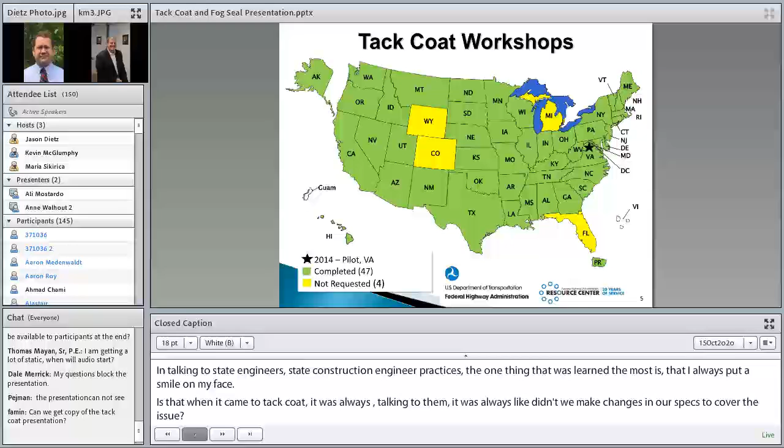And as we were doing our workshops, we found out that wasn't often the case. A lot of those specifications, they wanted to do it, but it wasn't a high priority, and that came to be a very interesting topic as we went around the country, as well as in their plans and how it was done. We'll talk a little bit more as we go through here today.

So some of the outcomes that came out of those workshops: Federal Highway had a best practice tech brief, and at the end here there'll be a site where you can go for further information. There also came the development of AASHTO specifications that weren't readily available, and here were 2, the MP 36-18, as well as the PP 93-18, for material and design specs.

The construction specs are currently in the works, but at least we have these 2 to get started with. And then came the NCHRP synthesis report that we're going to talk about today, because I'm not really sure many people knew much about that.

And then increased application rates - everybody was worried about putting too much tack on, so we'll talk about that, as well as DOT specification revisions, as I mentioned before. I spent a lot of time working with state agencies on making those modifications to their specifications and getting up to speed.

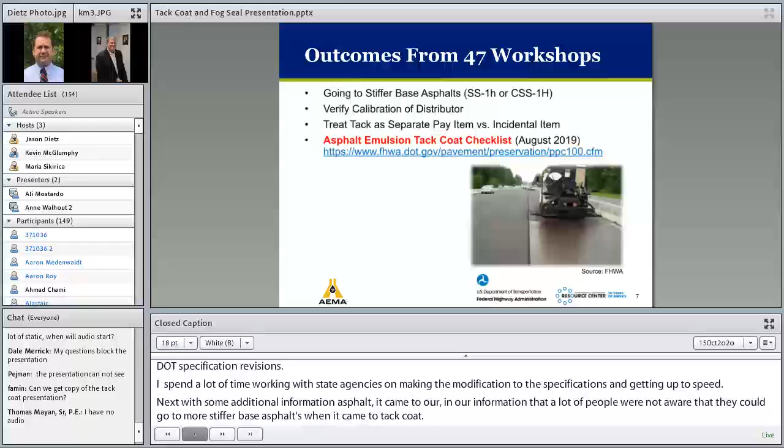Next, some additional information, going to stiffer-based asphalts. It came to our information that a lot of people were not aware that they could go to stiffer-based asphalts when it came to tack coats. So in simple terms, it was just by changing a slow setting 1 to a slow setting 1H, or a cationic slow setting 1H. Having those stiffer-based asphalts made a difference, and it was nice to get feedback from some of the states that made that change and said it worked really well for them, as well as verifying the calibration of the distributor.

That became a very interesting topic - we found out that oftentimes distributors weren't calibrated. We do it for our hot mix asphalt plants, we do it for a lot of other things, we probably should be doing it for our distributors as well.

Treating tack as a separate pay item was another thing that we saw, versus an incidental. And then another thing that came out is we had a checklist. For those that are aware, Federal Highway has many checklists for different preservation treatments. We also incorporated another one for tack coats, and as you can see from the site shown there, for further information if you would like to see it.

Moving on, we're going to spend some time talking about the synthesis the most because I'm not sure many people are aware of it. This report came out of the 2016 annual meeting at TRB Standing Committee on Surface Requirements of Asphalt Mixtures. Many practitioners discussed the immediate need for a summary document regarding the state of the practice of tack coat specifications, materials, construction practices, and acceptance procedures. A lot of that information wasn't well known. Thus, we established this group, and I want to share with you some of the things that came out of that document.

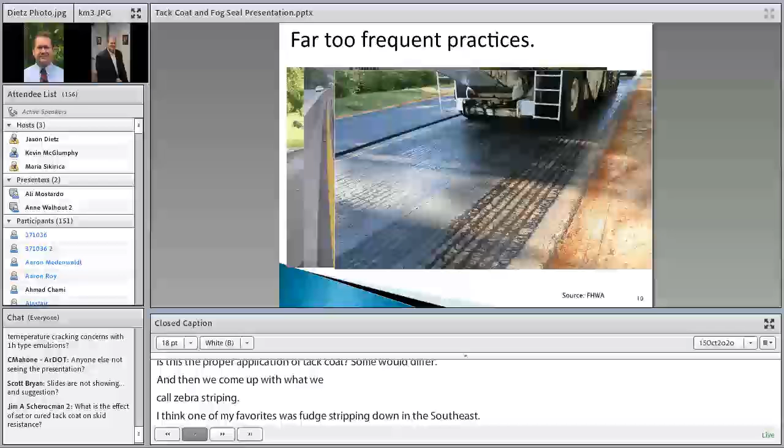And then here's another one. Again, more windrows. Looks like some of the nozzles are spraying a little bit more in some. So we really want that triple overlap to make sure we get that proper bonding.

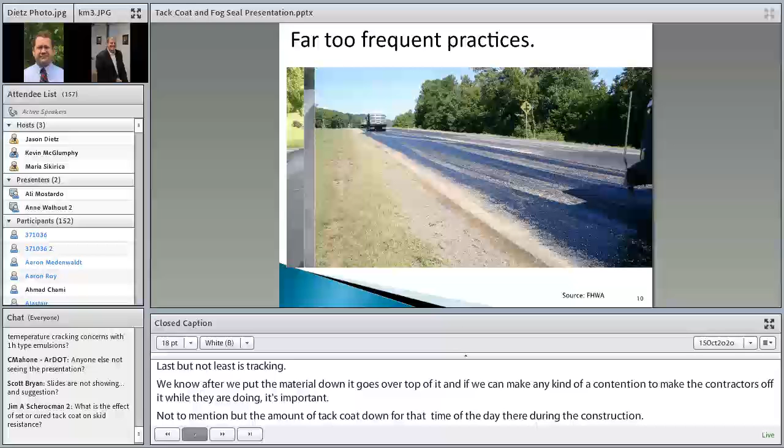And last but not least is the tracking. We know after we put the material down, trucks go over top of it. If we can make any kind of intention to try to keep the contractors off it while they're doing it is very important. Not to mention, put the amount of tack coat down for that period of day of what they're going to be doing the construction. If they're going to be doing more work tomorrow, try not to put the material out for that ahead of time. Do that the next morning. That way you don't run into issues of people running over it during the nighttime, and there could be some problems that may occur from that as well.

Furthermore, at nighttime, often many agencies through the cities, we do a lot of nighttime construction, no difference. We see a lot of tracking, so we need to improve this.

The first one, let's look at the definition. A tack coat is a sprayed application of an asphalt cement upon an existing asphalt or a Portland cement concrete pavement, which may or may not have been milled before an overlay or between layers of fresh asphalt concrete. So there is a difference, and oftentimes we get questions, what's the difference between a tack coat versus a prime coat? Well, a prime coat is when you spray the material over a subbase or a base material and then put the material over top of it. So there are differences.

Moving forward, what do we mean by undiluted emulsion? That is emulsion that consists of a paving-grade asphalt, water, and an emulsifying agent. When it comes to diluted, it is that emulsion with additional water added to it. The most common case is a 1-to-1 or 50-50 part undiluted emulsion with 1 part additional water.

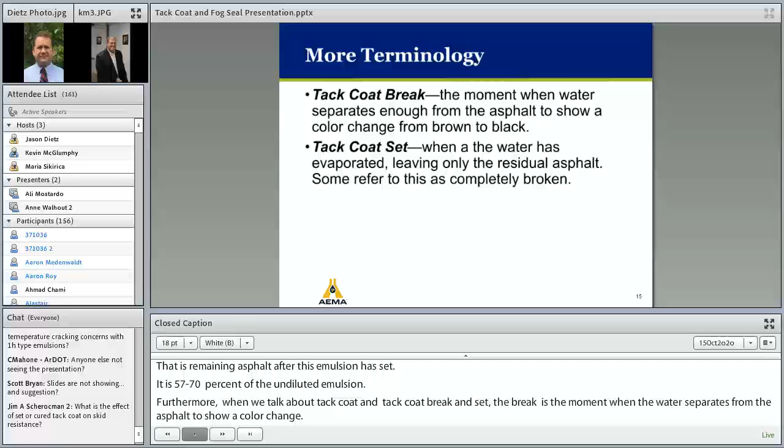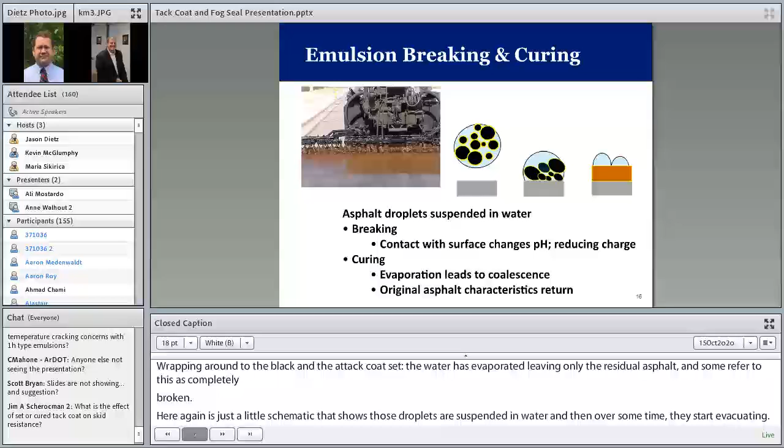Here again is a little schematic showing those asphalt droplets suspended in water. Over a period of time they start evaporating, and you're left with that brown material. It's breaking as the surface pH changes, reducing that charge, and then it turns black. It cures as the evaporating leads to coalescence, and the original asphalt characteristics return. So that's overall the breaking and setting of the emulsion itself.

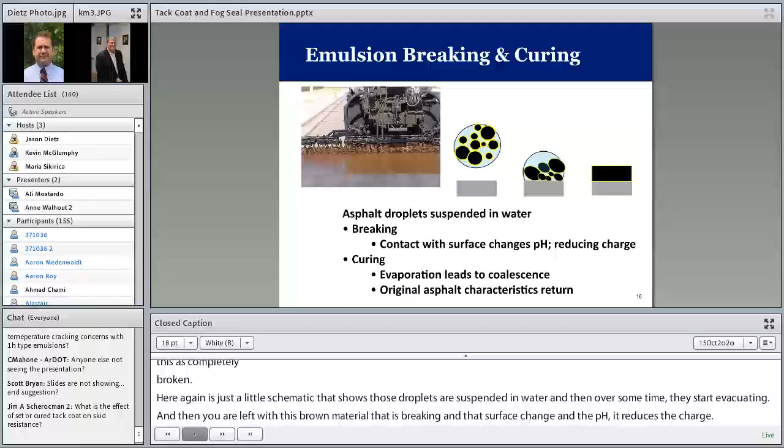So it leads us to our first poll question. Let me bring up the poll. A broken emulsion is the remaining asphalt after emulsion has set. True or false?

You got 50-50. Now it's jumping back to true. We'll leave it another minute or two, and then we'll close the poll and broadcast the results a little bit. Looks like true is coming in.

We'll end the poll. The question was: a broken emulsion is the remaining asphalt after an emulsion has set. That is actually false. It's the tack coat set that is the remaining asphalt after the emulsion has set. Thanks for responding, almost there, but that terminology plays a very important role when it comes to understanding tack coats. Moving on.

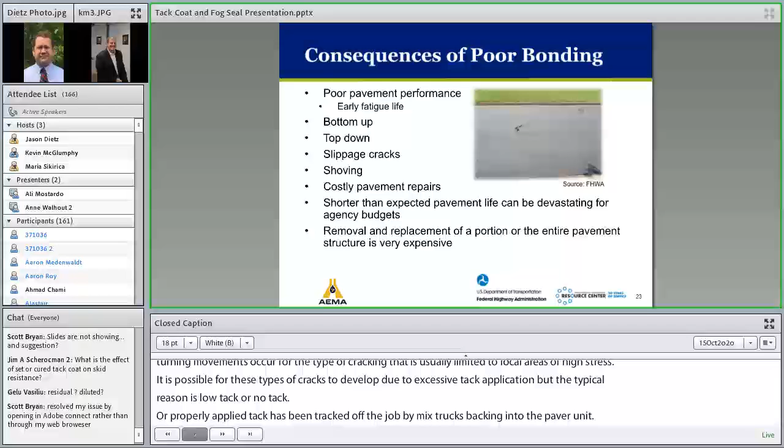So as we look at that, the question I usually ask folks is what would be the direction of the traffic. You may have it one way or the other, but oftentimes the traffic is moving in the direction of the red area.

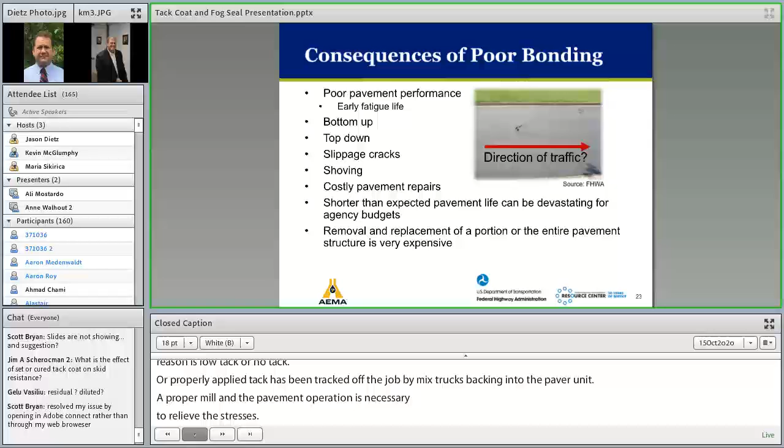Moving on, back to the survey, when it talked about the failure types cited by the agencies, the number one that came in was slippage of surface layers. The other one was delamination of the pavement layer. It was interesting to see the results that came out of this.

Moving on, the loss of fatigue life examples. Oftentimes people want to know what the published research shows about the consequences of bond and its effect on fatigue. Here's some literature that came out from May and King, done in 2004 for a TRB presentation. They found that 10% of bond loss resulted in 50% less fatigue life.

Another one, Roffe and Chaignon, from 2002, talked about characteristics testing on the bond test. And then the last one, Brown and Brunton - the influence of bonding between bituminous layers is what their journal talked about. They mentioned that for no bond, there's 75% loss of life. So it makes a big difference.

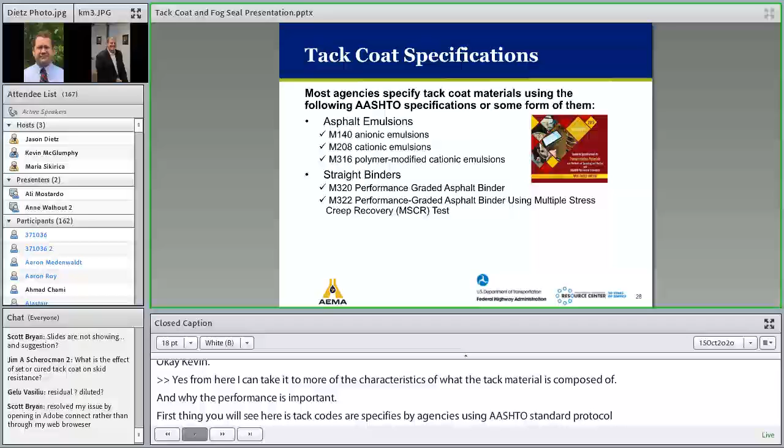First, tack coats are generally specified by agencies using AASHTO standard protocol. You can use emulsion or binders in most states, or a combination of the two. I'd caution you to contact your local state agency and/or your local suppliers to be sure the nomenclatures used are available in your state or area. Some states will change nomenclatures and write their own version of a specification, so always reference your state manuals. These are pretty standard: M140, M208, M316, M320, and M322 are the standard binder specs and limits.

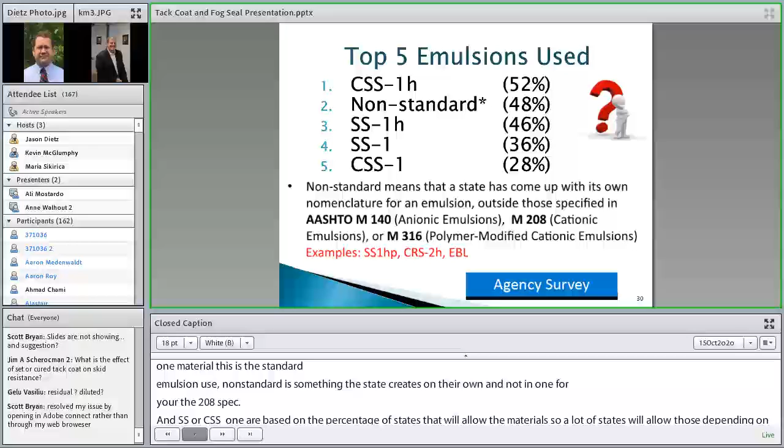Breaking that down further, as mentioned, some states allow more than one material. This shows the standard emulsions used. The SS1H non-standard would be something the state creates on its own, not in the M140 or 208 spec. And then SS1H, SS1, and CSS1 - those percentages are based on the percentage of states that allow those materials. A lot of states will allow CSS and SS depending on what suppliers can provide and a mixture of these things, so that's not supposed to add to 100 - it's not the percentage of states allowing that usage.

Reduced tracking tack emulsions are something that's come up over the last 8 to 10 years. It tries to keep most of the tack under the pavement instead of tracking up on the wheels and equipment on the construction site. It's a chemistry adjustment and/or penetration adjustment to the tack coats, and there are a few different types. 24% of the non-tracking tack used has the nomenclature NTSS1HM, and there's a bunch of different varieties - most emulsion suppliers have their own version of a reduced tracking tack. I'd recommend you reach out to your local producer or supplier to get their perspective if you're going to use that.

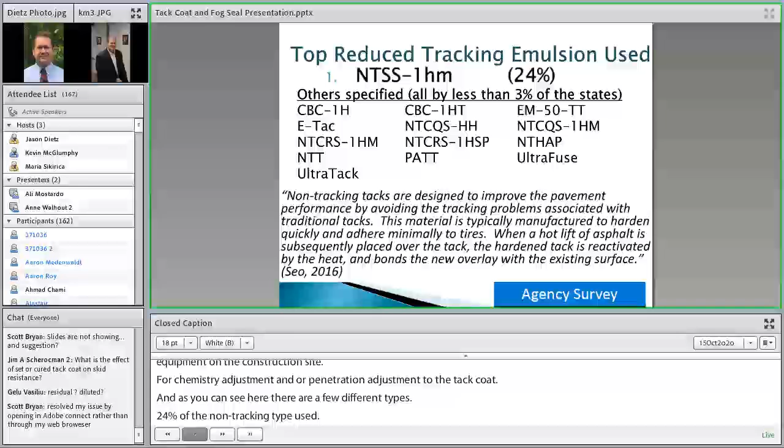Material acceptance. Every agency generally has a method for material acceptance. If you are using standard AASHTO acceptance materials, you generally just have to be on an approved source list with a DOT. You get on that approved source list by doing some paperwork and submitting some samples and testing. And once you're an approved source, you have to comply with a quality control program that the DOT approves for you.

To be able to ship materials in their state to ensure that you're providing quality on-spec material for them. Some states have supplier certifications, which is a little different, where your material meets the agency spec, and they just assume and act as if because you met the spec that you are certified to supply there. And then the testing of samples is a regiment that's under your QC plan.

There are some things that are one-off type materials that we talked about that aren't standard. And in some of those instances, the supplier will produce a material that performs in the field in trial mode. Once the DOT sees the performance, the specification is shared with the DOT from the supplier, and the tests for supplier certification are then reflective of the test of the material that was trialed.

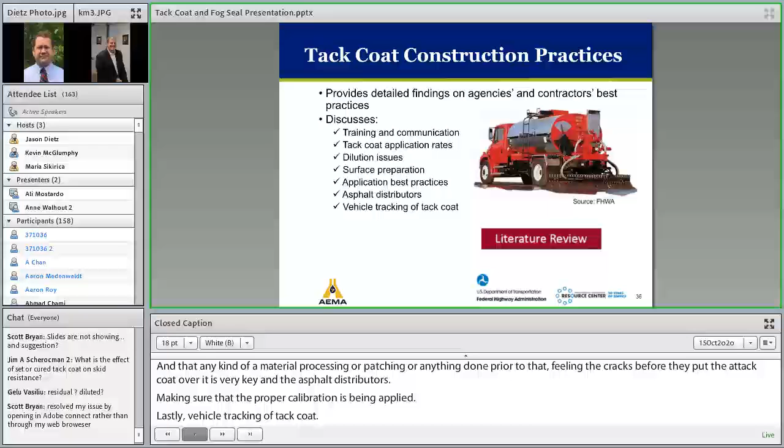Next, through the survey, I looked at dilution, looking at the pros and cons. And as you remember at the beginning, when we talked about dilution, usually that is adding water into the mix. Through the survey, it looked at the agencies, and it was a fairly even split regarding whether or not they diluted it.

The pros: larger liquid volumes allow easier flow, and often that was the case that we saw for most of the western parts of the country, where the areas of their pavements were a ways from the plant. They wanted the ability to have dilution, not to mention with that water that provided them extra time. Larger liquid volumes also allow easier overlap of the fans, and that was often the case when a lot of this equipment was from earlier days—not saying nowadays, but with the more advanced equipment we're seeing out there, this may not be as much of an issue as it once was.

And then looking at the dilution cons: the risk of losing control of the product, adding additional time to break, and lastly, increasing that risk of the tack flowing on the roadway surfaces. We didn't want that to happen.

Moving on through the survey, what was allowed and what wasn't was pretty close to being a straight split. It came in at 48% dilution and 52% not diluted. Oftentimes we see on the undiluted side, it's most of the states east of the Mississippi that really didn't have to worry about diluting it as much.

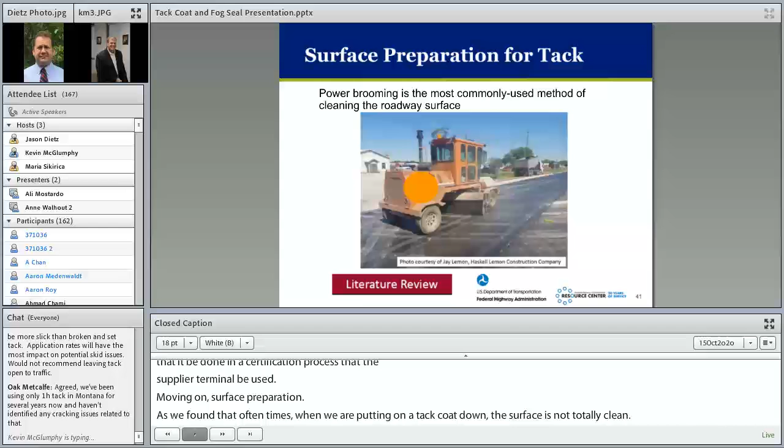So the survey asked a few questions on this. Power brooming was the most commonly used method for cleaning the roadway surface. In addition, they looked at air blowing and vacuum, which came in at 25%. Multi-specified methods came in at 2%, and clean but method not specified came in at 33%. So that is an area that we probably need to do some work on in our specs, to clean that up so it's not just left unspecified.

Moving on, what do we mean by clean? That was another question in the survey. The surface must be dry - and what do we mean by that? Oftentimes when we did our workshops, we mention SSD, saturated surface dry.

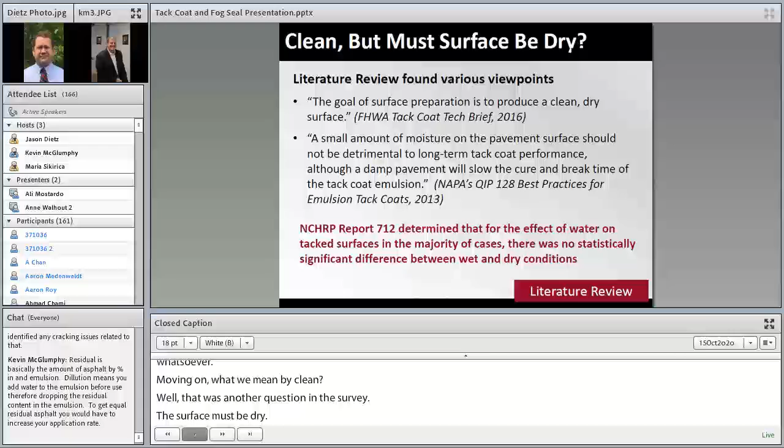It may have a little bit of moisture in it, but in areas of the country like Florida, with the amount of rain they get, to get completely dry would be impossible sometimes. So some of the things that came out of this: the goal of surface preparation is to produce a clean and dry surface - that came from the Tack Coat Tech Brief. In addition, a small amount of moisture on the pavement surface should not be detrimental to long-term tack performance, although a damp pavement will slow the cure break time of the tack emulsion.

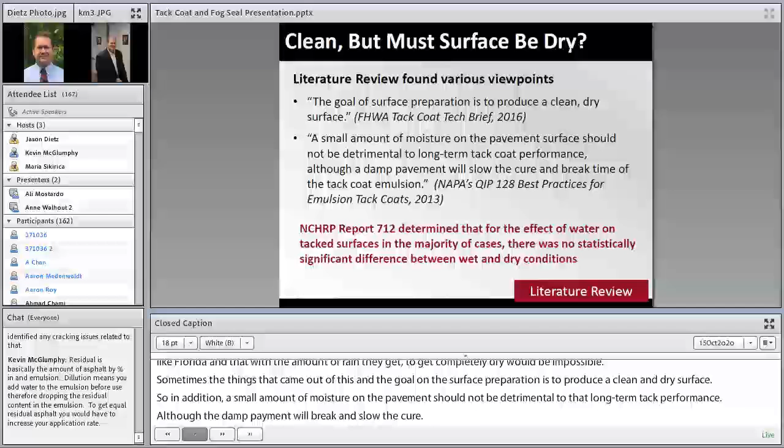Another thing came out of NCHRP Report 712, which determined that for the effect of water on a tack surface, in the majority of cases there was no statistically significant difference between wet and dry surfaces. So that was kind of nice to have and something to share.

Furthermore, another important thing that doesn't get recognized as much is the application temperatures. As you can see from the differences in the types and grades - the rapid sets to the slow sets, and moving down to the rapid sets to the non-tracking materials - temperatures play a really important role.

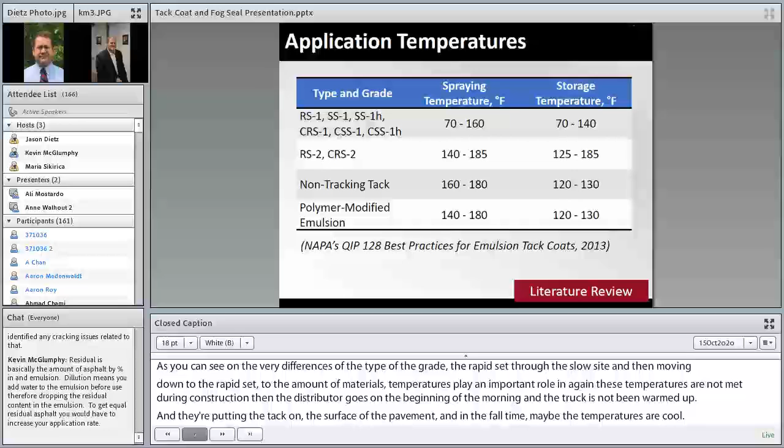And again, if these temperatures are not met during construction - the distributor is going out at the beginning of the morning, the truck has been sitting there all night long, and he hasn't warmed up the truck enough - and he's going out there putting the tack on the pavement surface, say in the fall time when the temperature is fairly cold, he's not properly getting that proper temperature that he needs, so he's not getting the proper break and set time, and that can cause tracking. This was something I personally felt was an issue we've seen across the country that probably needs to be inspected a little bit more, and it could help out when it comes to tracking issues.

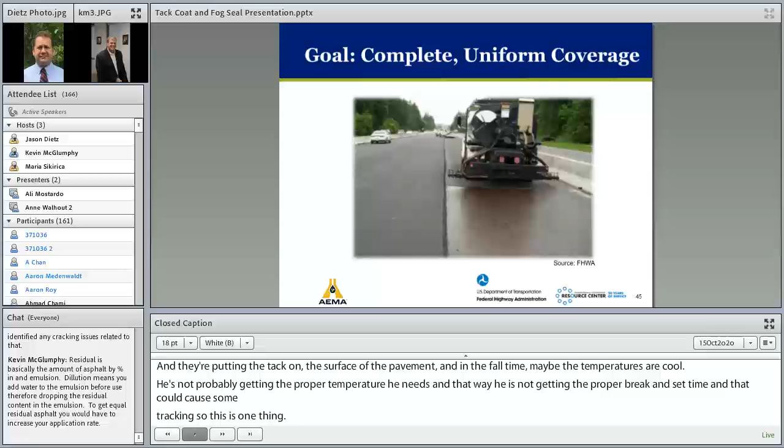Moving on, some of the goals to complete that uniform coverage were set, and we need to make sure, as you can see from the nozzles, that we're getting that proper application. We're seeing a little bit of windrows and things happening, but we want to make sure that the coverage being set by the distributor is complete.

Furthermore, for the spray requirements for the distributor: have uniform nozzles. Oftentimes when these distributors come out of the manufacturer's yard, they have a size 3 on some of these distributors, and oftentimes when they're putting a tack coat down, the size of those nozzles is usually another size, like a 1. So right then, they're putting a bigger nozzle down, putting more emulsion onto the pavement - that's maybe why they're turning off some of the nozzles, and that could be an issue.

So we also need to make sure they're clean - periodically they need to be cleaned out. Have that maximal angle - oftentimes 35 degrees for each nozzle, for each valve, is often recommended. Having the proper height of the spray bar, 12 inches, which is most common. Having that triple overlap, where we get excess material to cover so we don't have windrows, and double overlap of emulsion streams, and then lastly, spray without overlap of the emulsion streams.

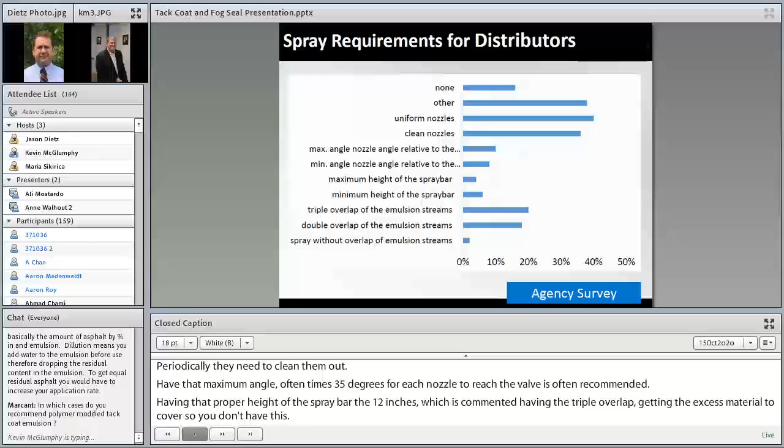So what came in the highest was cleaning those nozzles and having uniform nozzles - they're very important.

Okay, we come to our next polling question. How often is the distributor calibrated? Let's bring up this poll.

Now, be honest. When you see this on your projects, how often do you think these distributors are calibrated?

All right, I'll broadcast the results. Looks like, Kevin, folks are responding that it's annually, and it's kind of nice to see. I'll end it. We got a few there that say never. And then we have some that say per job, but other was not. So that was one of the questions that we wanted to get out of the survey.

So let's hide that, and let's see what came out of that survey when it came to this. Hope this won't be a surprise to folks. But through the survey, how often were these distributors calibrated? Look what came in number one: it was never. Then came other, then annually, and then per job.

But oftentimes, as we found, most agencies have the bill of ladings, and if they could use those bill of ladings and maybe incorporate another item in there about when the machine was calibrated, that might be a simple way of correcting that. But again, that's just a recommendation on our part that we wanted to share with folks.

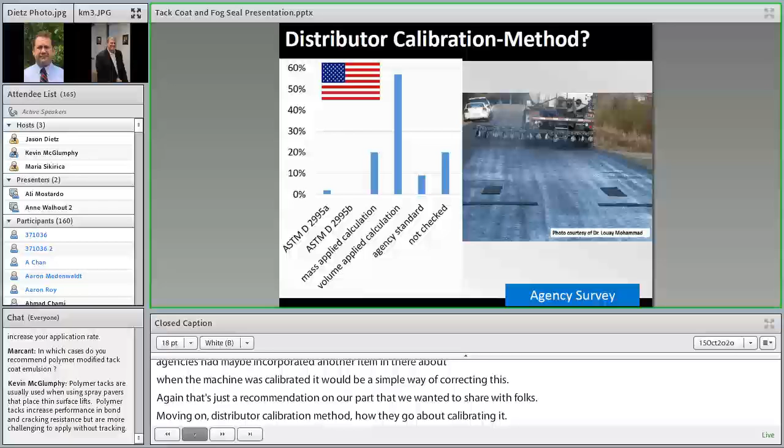And then looking at the volume, maybe bringing out your dipstick that's on top of the distributor. Often people don't know that, but on top of the distributor is a hole, and the dipstick is up there where it's magnetic to the distributor. Take it out, and they just poke it in, and then they take that measurement in the morning and in the afternoon, and that's how they calculate their volume.

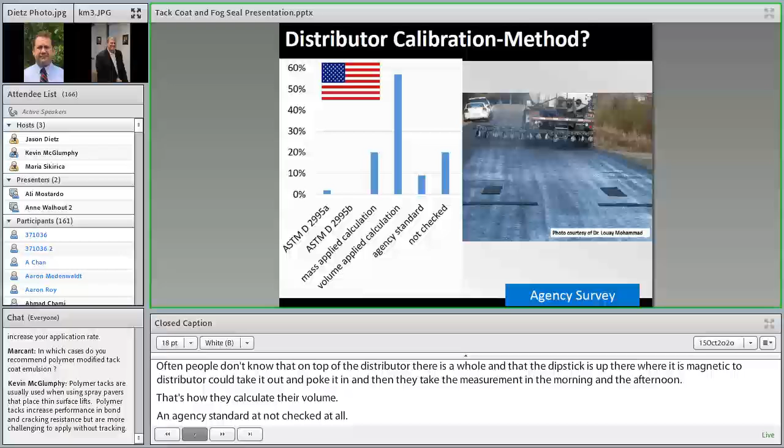And then agency standard and not checked at all. So there's a variety. And through the ASTM procedures, you can see the felt pads that are being applied onto the roadway, and one can put them on and then over to construction, at the spray application, being sprayed, and then they can take whatever method they have, take those pieces of felt off, weigh them, and then get their understanding of what that application rate is.

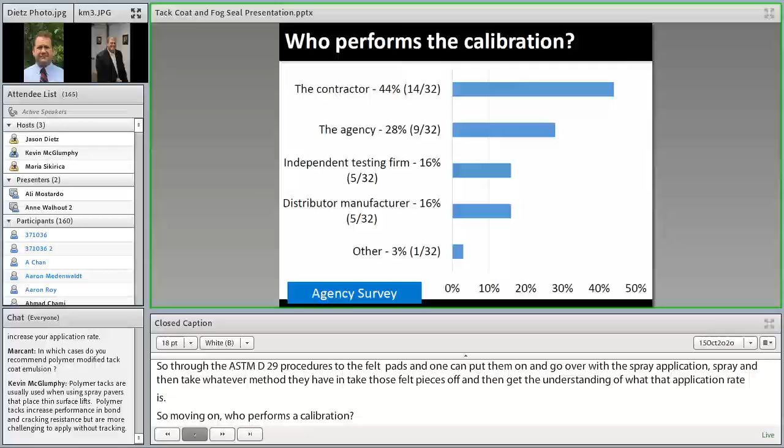Moving on, who performs that calibration? It's nice to have a calibration, but who's going to perform it? Well, as it was seen here, oftentimes through the survey the contractor did. It came out 44%. The agency, 28%. Some even had independent testing firms that were doing it, as well as distributor manufacturer, and then others. So this was kind of nice to see. At least it's being done, maybe not enough, but at least the contractors are making the push to make sure that's being done.

When is traffic allowed on the tack? That's often the big issue. As I mentioned, some places in the country apply it maybe the night before, and then they start up the next day. But is that the best way? Oftentimes through our workshops, we recommended that it be done for that day's production.

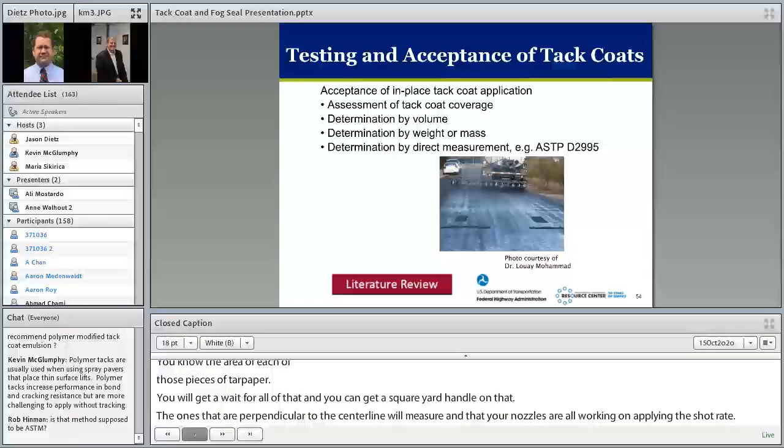I think that's the two main things from a contractor and supplier perspective on making sure you're getting what you're paying for. And I will turn it back to Jason for field performance.

Next, they also looked at the testing and acceptance of the tack coats and what methods are out there currently that agencies are using. They looked at laboratory or field bond strength testing used for product approval, and what field testing was used to assess the quality of that field application.

Some common methods for load application were tension, shear, and torsion. Others were non-destructive versus destructive, and cyclic versus monotonic.

The one here that I'm showing is from Louisiana, the interlayer shear strength tester. I wanted to share a little bit for those that may not know what this is. It's a simple test where you put your sample in, apply a load, and as that load is applied, you get some kind of shear right on that side.

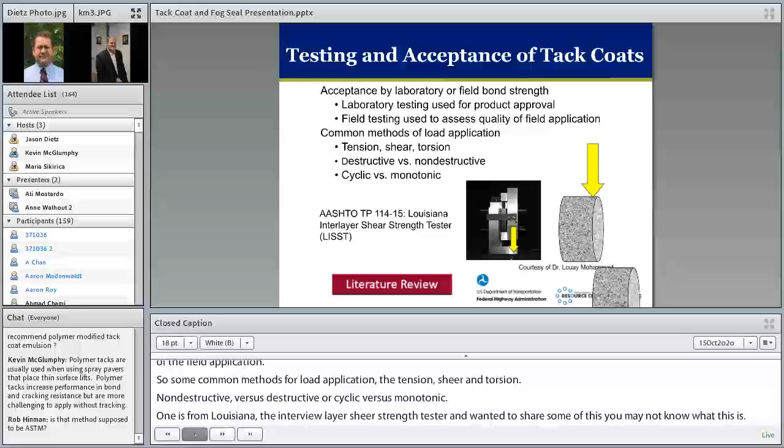For further information, there is now an AASHTO test method, TP 114-15, that agencies can use for this particular type of test.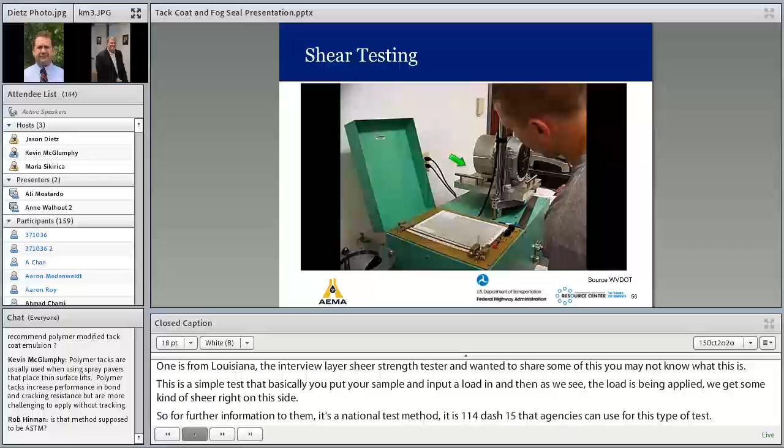That's one type of method. So looking at these bonding strength tests, 9 out of 14 states conduct some type of bond strength testing, so not too many.

Next, when do agencies perform this bond strength testing? On every project, by special provisions, for product evaluation, or as part of a forensic investigation where they had some failures. Oftentimes it wasn't on every project, which probably isn't really needed, but it was kind of nice to see.

It was interesting to see the one that came in highest was as part of a forensic investigation - they were having cracks and issues, so they looked at it, which was a good thing. But we'd like to see it become more common practice if issues are seen, done more often. Nowadays, with thinner pavements being put down, we're seeing more delamination occurring, so having some kind of test method is a good thing to have.

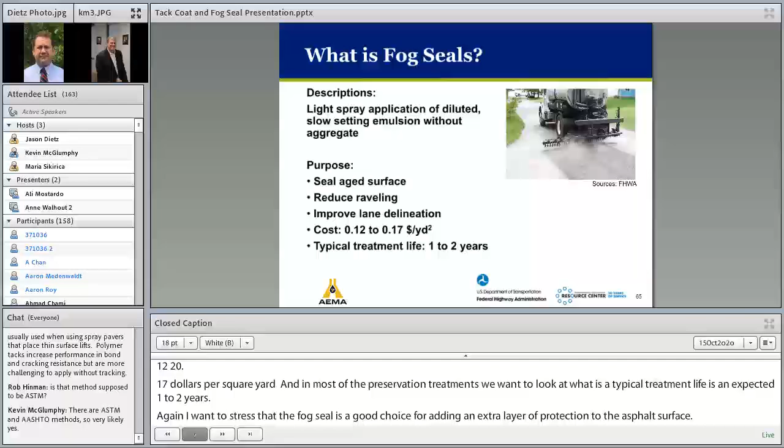I want to stress that fog seal is a good choice for adding an extra layer of protection to the asphalt surface. This seal will not compensate for more serious problems like asphalt that has experienced more than minor aggregate loss. A fog seal will also not work as a method of treating cracks or other structural issues. Fog seals should be considered a rejuvenating option, meant to offset the process of oxidation, weakening, and increasing brittleness. Eventually, the aggregate will start working loose.

Fog seal prevents this through the addition of extra asphalt binder. Fog seals also help fill any tiny spaces that form between the aggregate particles as the asphalt binder ages and wears away, ensuring that the surface remains smooth. Fog seals also increase the pavement's ability to resist water damage by reducing the amount of water that can pool onto the surface.

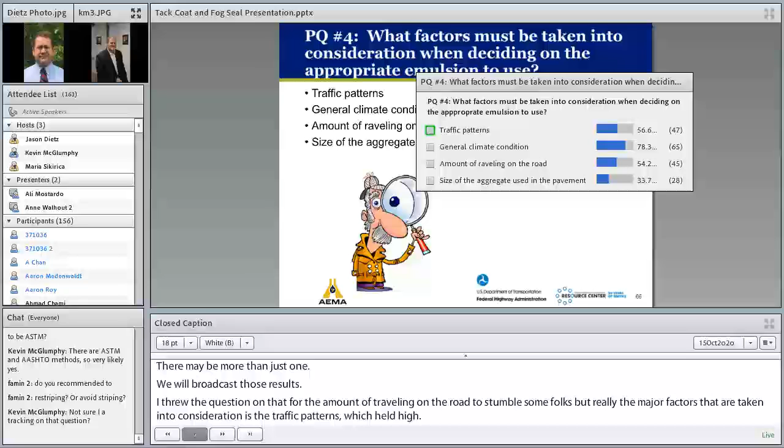We'll broadcast those results. I threw that question in there about the amount of raveling on the road just to stump a few folks, but really the major factors taken into consideration when deciding on the appropriate emulsion are the traffic patterns, the general climatic conditions, and the size of aggregate used in the pavement - all very important. The amount of raveling would help, but it's really the traffic pattern, climate, and aggregate size that matter most. Thanks for doing that.

So what is the fog seal? A fog seal application must penetrate the surface voids - this is very important. In order to successfully do this, a fog seal coat must be diluted enough to easily flow down into the gaps between the aggregate particles. There, the water will evaporate, leaving behind the asphalt that will help bind the aggregate together more strongly.

An excessively thick fog seal will end up sitting on top of the aggregate, which leads to major skid problems we don't want to get involved in. First, the fog seal will be exposed to much more friction, meaning it will wear away quickly and leave the aggregate as unprotected as it began. Secondly, by remaining on top of the aggregate, an overly thick fog seal reduces the pavement's traction. This can cause dangerous conditions on high-speed roadways, and is often the reason many state agencies haven't used it on their interstate systems, as a loss of traction makes cars more likely to skid and lose control.

So determining the ideal dilution of a fog seal requires proper knowledge and experience. And I think that's a good segue to lead right into suitable surfaces.

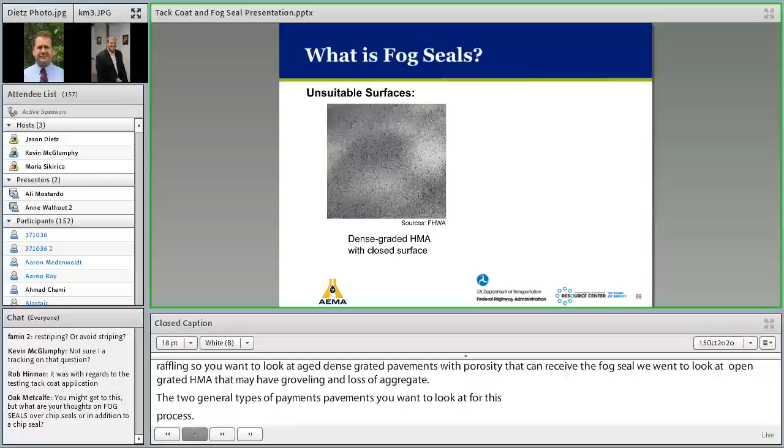So really, to get a successful job, what do you need to do? Surface prep, as in anything, is important. You want to make sure the road looks clean, relatively dust-free, free of particulate matter, dead animals, things like that. The asphalt and emulsions will not stick to greases, oils, and such, as general normal practice.

Material preparation, you just want to make sure the material is at the temperature that it will apply smoothly. So the recommended temperature, and make sure that your bars are clean.

Emulsion application rate will depend on the surface. So you want to make sure you talk to your supplier and/or applicator, contractor, or reference your DOT spec book for the types of pavements that they have. And then there's times when you'll have to have sand blotter out there. If you've got variable pavement surface conditions throughout the project, you might have to blot a few spots just to assist in the breaking of the emulsion.

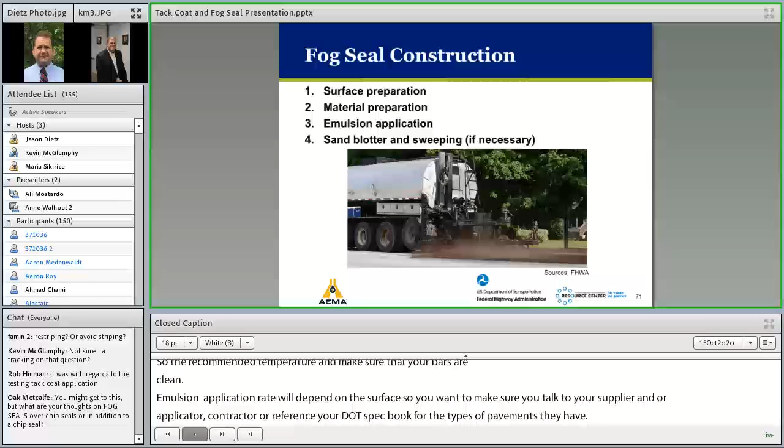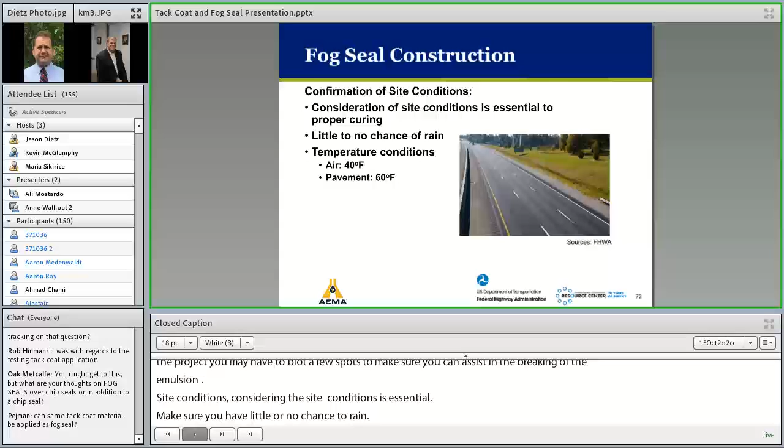Site conditions are essential to consider. Make sure you have little or no chance of rain. These are water-soluble products in most instances, so if they get rain before they break, you could have some brown staining of the shoulders and maybe the ditch line. So you want to make sure you have good pavement temperatures and no chance of rain.

Here's some example pictures of surface prep. Good clean road, it's got a little loss of fines, and this would be a perfect candidate.

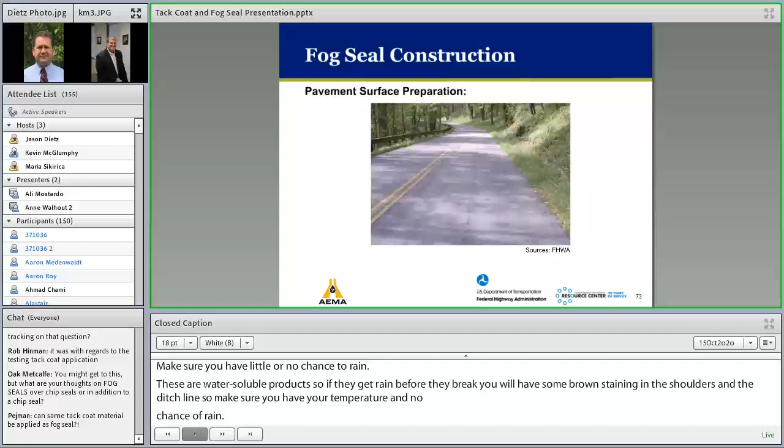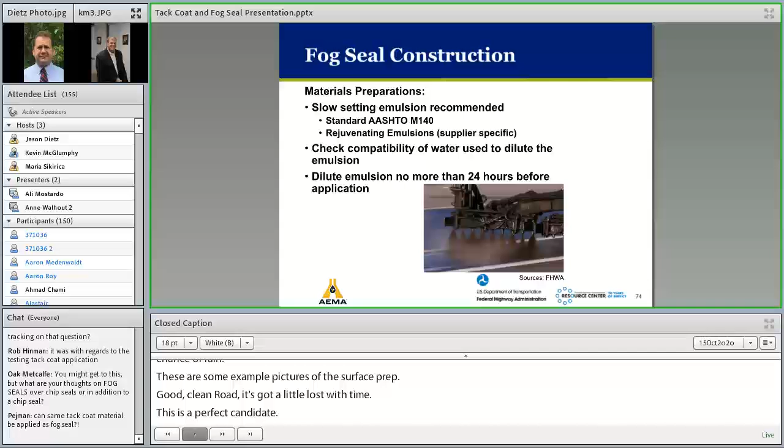So the materials that you would generally use for these are slow-setting emulsions, either CSS or SS, depending on the area of the country that you're in. Most of them are standard AASHTO M140 spec, and they will work that way. There are some higher performing materials out there, supplied by emulsion suppliers across the country, that may have polymer modifiers or other modifiers in them that will decrease the wear and make them last longer, stay blacker longer, things like that.

There are also rejuvenating emulsions that are designed to penetrate down into the surface of the pavement further and give back some of the life at the top quarter inch of binder, to kind of reseal cracks and rejuvenate the binder and the surface layer. Those are supplier specific also in most cases. So if you had those issues, you would want to reach out to your local providers and talk to them about it.

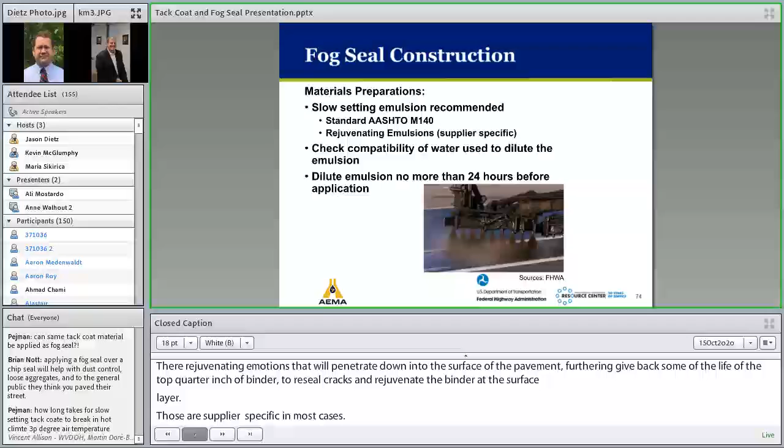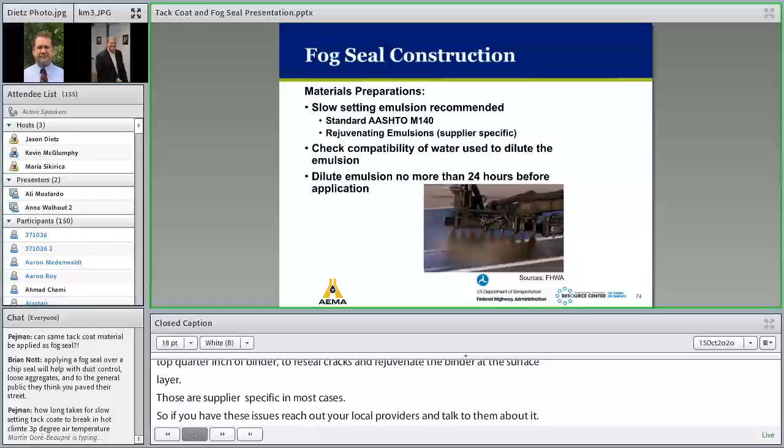Check compatibility of water used to dilute. Not all emulsions are miscible with water. There is a miscibility test in the AASHTO T59, I believe. I think it's still T59. But if you're going to dilute a slow set emulsion, you would want to make sure that test was run so that the water did not break the emulsion in the distributor. And then you want to dilute the emulsion no more than 24 hours before, so that there's no settlement or separation.

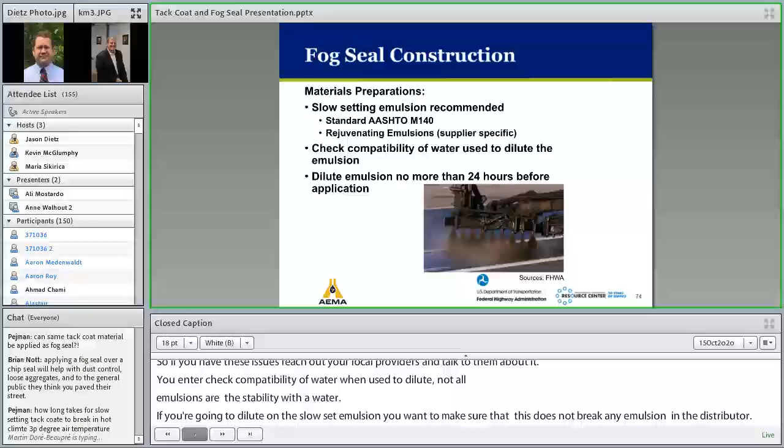Application-wise, you want to have a pre-construction meeting, understanding of the application rates, calibration of the distributor, good idea in that phase. You want to know your pump rates on your distributor, and a lot of distributors nowadays tie the pump rate to the velocity or speed of the distributor so that you're sure you're getting the right application rate in the wheel path. You also want to check the application rate across the bar. Talked about earlier for chip seal, so the calibration of the distributor is pretty much the same for fog seal and chip seal. The application rate's just different.

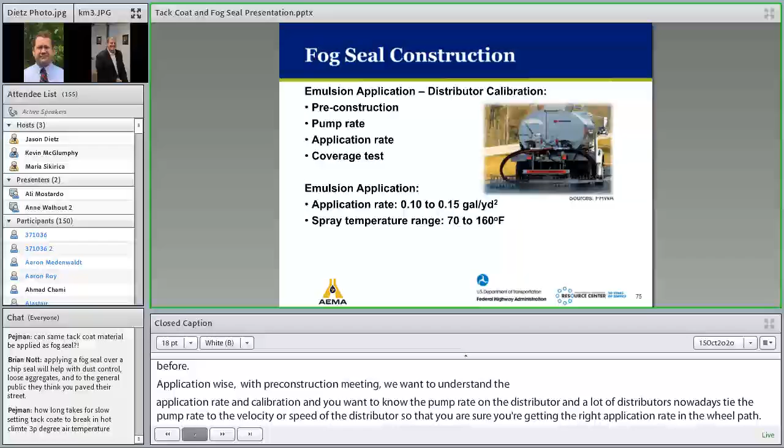And then you want to make sure you're getting full coverage and not wind rowing or corn rowing, depending on what part of the country you're in - they call that different things. The application rate's usually very low, considering, and the spray temperature of SSs and the CSS type emulsions are 70 to 160, so it's almost ambient.

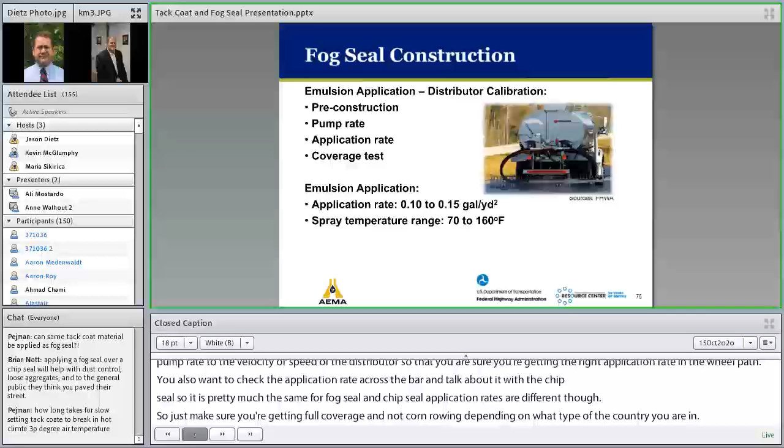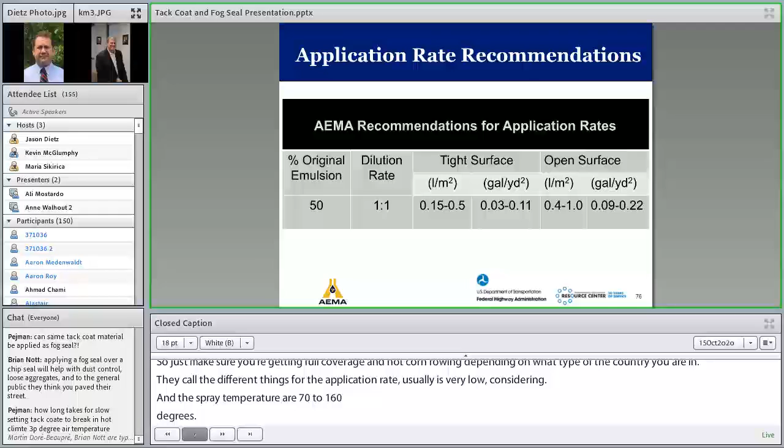Here's a little calculation showing emulsion, percent original emulsion dilution rate, over a tight surface that's like a dense graded asphalt that may have some minor raveling, what your shot rates might be, and then over an open surface, if you had an open graded friction course that was raveling a little bit and you wanted to tie the surface up. You can see that there's a good bit of difference between the application rates that would be desired to do the same fix for both of those pavements.

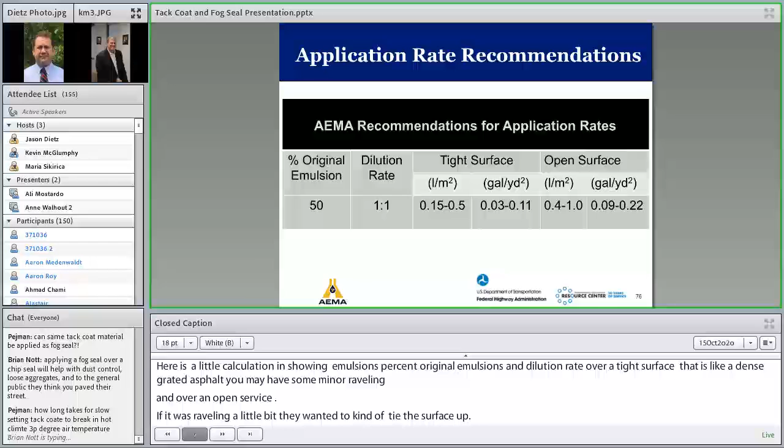The other thing that impacts it is the bar pressure. If you have high bar pressure or low bar pressure, it'll also impact the width of that fan. So you want to make sure you've got a pretty constant bar pressure and a pretty constant bar height.

The last thing that impacts it is your nozzle type. Distributor manufacturers have several different nozzle settings, and you pick the nozzle based on the viscosity and application of the material you're trying to spray. It's no different than a paint gun or any other thing you'd use around the house—a yard sprayer, pressure washer, things like that. The nozzle size will impact the width of that spray.

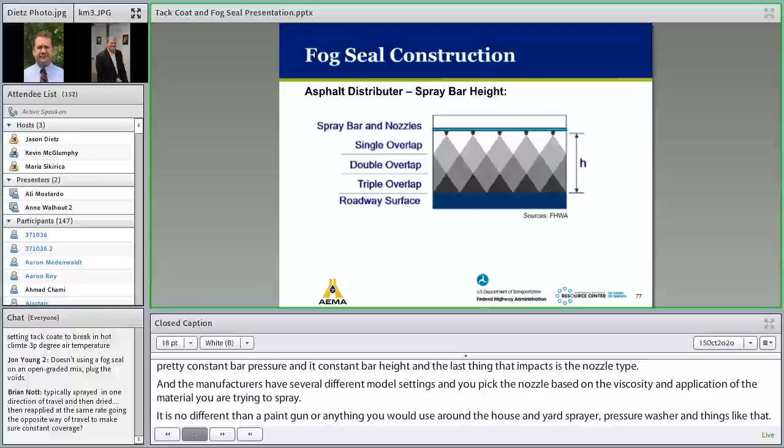So you want to make sure you look at your distributor manual and have the right nozzles for the viscosity of the material being applied.

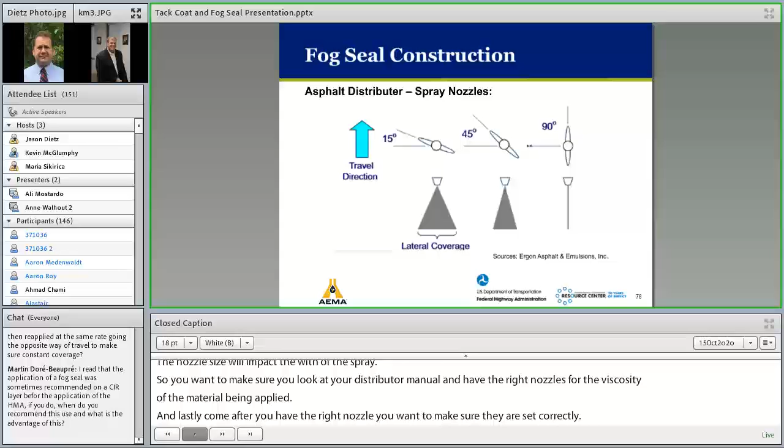After you have the right nozzle, you want to make sure they're set correctly. A 90-degree setting will give you a pretty much constant stream. 45 will give you a little more of a triangular shape, and the closer you get to 0, the wider the lateral coverage would be. So you want to set those angles so you're getting good triple overlapping action across the spray bar. Again, that should be in your manual for your distributor and your bar pressures.

And I think Jason will take us home from here. You bet. Now to wrap things up, some post-treatment procedures.

You always want to keep sand blotter and sweeping opportunities available if necessary, because you may have some areas that are bled a little bit more than others, and that's why we have the sand blotter to take care of those things. As an agency, if this is the first time you're using fog seal, it's probably a pretty good idea to use it on a shoulder for a first application, just to get a handle on how it's going to perform and how it's going to work, making sure you've got the proper application rate and things like that before you go with the main line.

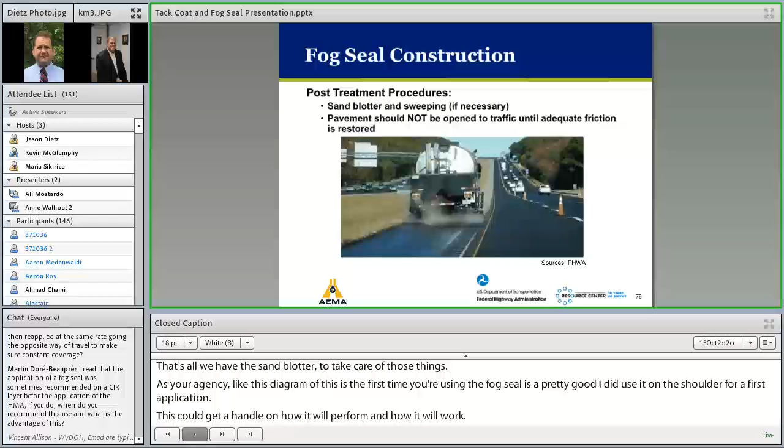In addition, the pavement should not be open to traffic until adequate friction is restored. So this is something one needs to keep in mind, and this may take a couple of trial test sections just to get everybody lined up to what is the best practice.